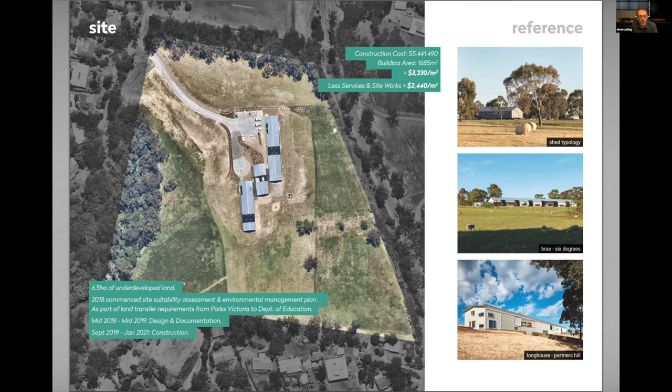We're in Wurundjeri country, not far from the Don River, which flows into the Yarra River just south of the site. Part of our early investigative works was a cultural heritage management plan and field investigative works, through which we identified site artefacts. These have now been catalogued, and they'll be reburied back on the site at a time to be designated.

Some early sketch ideas—this was actually part of the pitch to get the project, more of a poetic response, the idea again of the shed and what that could be.

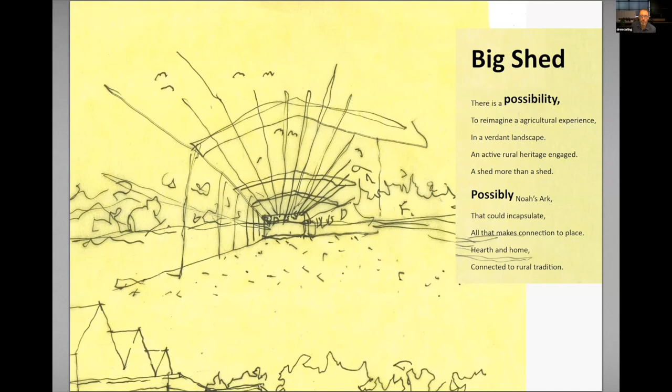Now we start to look at some of the strong influences on the site. Obviously landscape is a major one—we've got a strong existing ridgeline, and setback requirements for bushfire, in this case 30-metre setbacks. We're also very mindful of the environmental sensitivities around the site, so minimising the footprint, controlling stormwater runoff, controlling the overall impact of what we were doing here, minimising earthworks, etc.

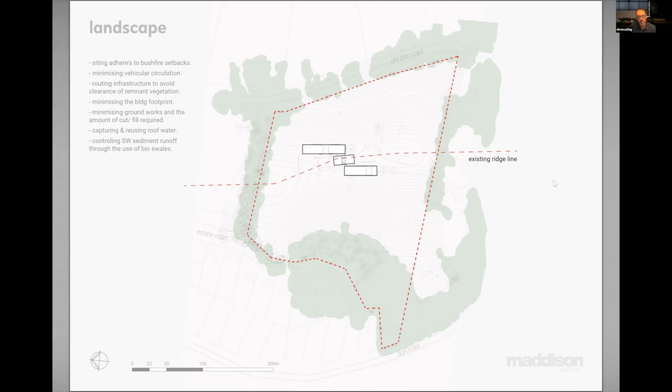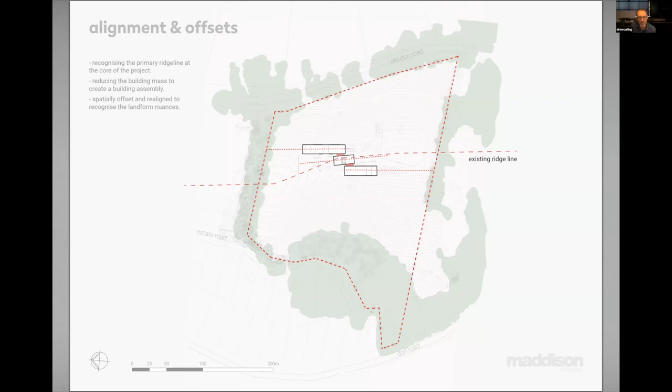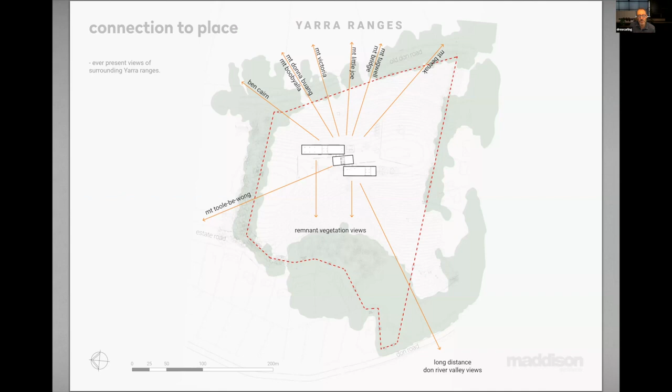Then, of course, the importance of connection to place and the views of this all-encompassing Yarra Ranges. There's incredible views looking out across the Yarra Ranges, views from all wings, both sides.

In terms of the program, we've got learning spaces. The central building is primarily a learning space with a multifunction space here, connections externally, internal courtyard that receives northern light. It's very strong in this overall building mass. Staff facilities here, and then ancillary learning spaces above and below that, with views out to the external areas.

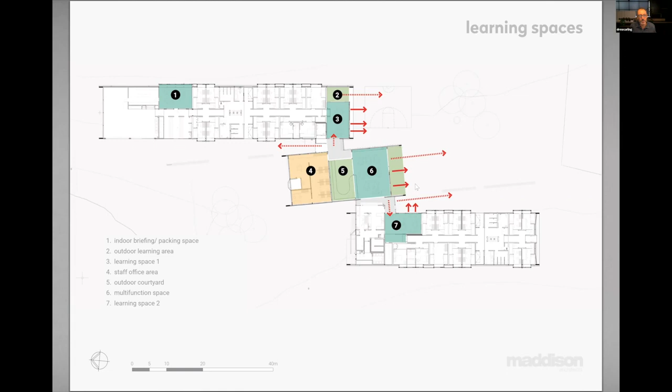The importance of getting activity areas, external activation of those areas close to the buildings themselves. For us, a really important factor is this observational datum line that runs throughout the building, so from the reception or staff areas you can see who's coming and going, if somebody's participating in the kitchen helping out, how the classes are going, even if the table tennis table is available.

Supporting spaces to the learning area: we've got this kitchen area which flanks onto the multifunction space, with a separate arrival and deliveries area. Then we've got this support to the expedition area, where outdoor activities depart and return from—gear storage, preparation of hiking bags, briefing sessions, and cleaning up areas.

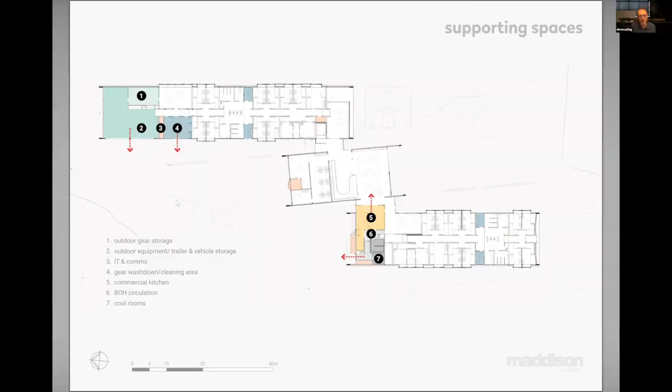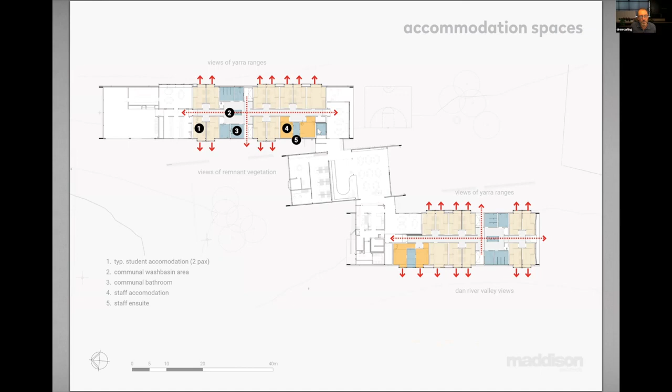The kitchen—strong social spaces, important learning areas in themselves. The accommodation areas: we've got bunk rooms for all the kids, a central wet area with laundry facilities, and staff accommodation being a 24/7 facility, with views out in all directions.

A lot of investment into the accommodation rooms themselves—custom joinery, saddlebag, window seats. We want to make the kids feel as at home as possible, using colour to give individuality in each of the accommodation alcoves. The central wash areas are where you can bump into each other and have a conversation.